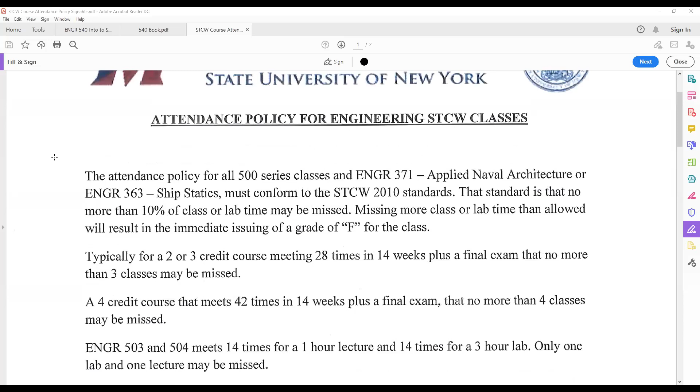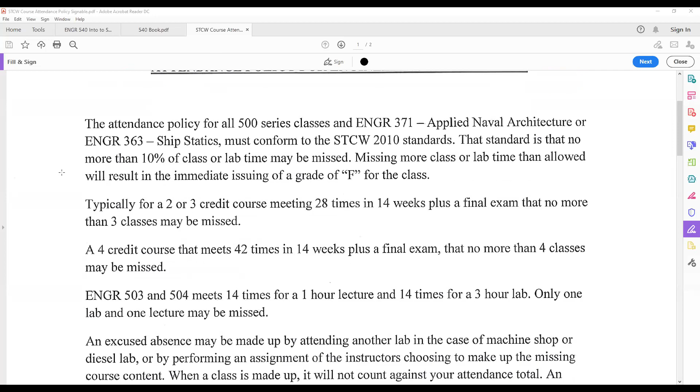So this is an STCW required class, a 500 series class for the engineering side of things. The deck department may have their own form, but this is ours. If you are in a 2 or 3 credit course, meeting 28 times in a 14-week period, I know we're doing 14 weeks smushed into 13, but we're going to stick with the 14 period, so it's better for you guys. Just enjoy that, don't get technical on me, that will just make it worse for you.

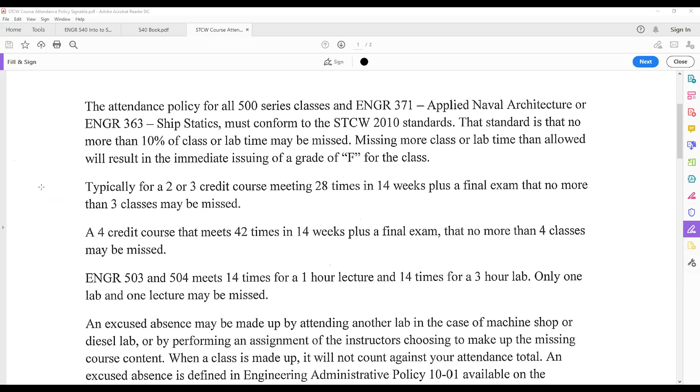Now, you can miss no more than 3 classes. Any more, automatic F, nothing I can do for you. Doesn't matter if you are a chief engineer taking this class for the first time, doesn't matter, Coast Guard doesn't care.

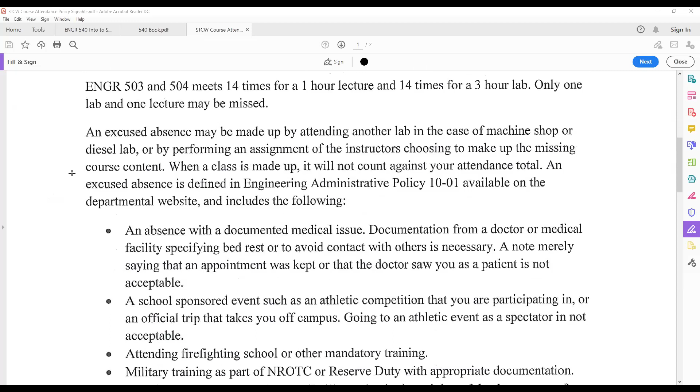Excused absences may be made up in another lab, in cases like machine shop or diesel lab. That doesn't really count for lecture. Excused absences include medical issues, doctors' appointments that can't be moved, or upcoming surgery. Obviously that can't be moved. You do your best to control it, but it's your health—take care of yourself.

I need something that says you were there—a doctor's note, not mom or dad or grandma saying you had a tummy ache that day and asking to please believe them. That doesn't really help.

School-sponsored events—Propeller Club is famous for having these. If you're part of the football team, even though it's spring, I use them as an example because they often have to leave Thursday nights and miss Fridays. So keep that in the back of your head. If you're on a sports team or in some school-sponsored event, we need a higher authority that allows you to miss these classes without repercussion.

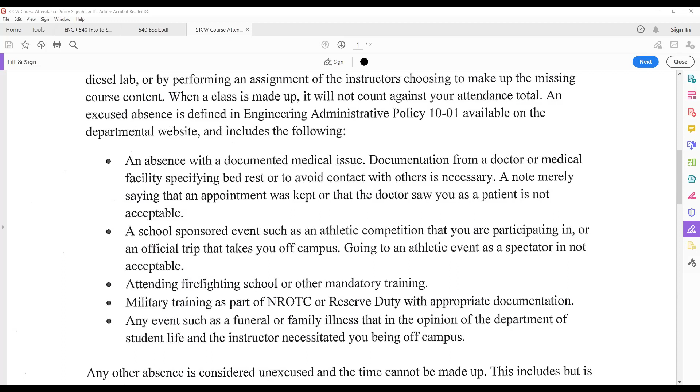Another school-sponsored event: advanced firefighting, basic firefighting, any basic or mandatory training that you can't get out of—something you didn't schedule yourself. Along with that, military training, NROTC, reserve duty, active duty—things you just can't control. That's what you've got to do.

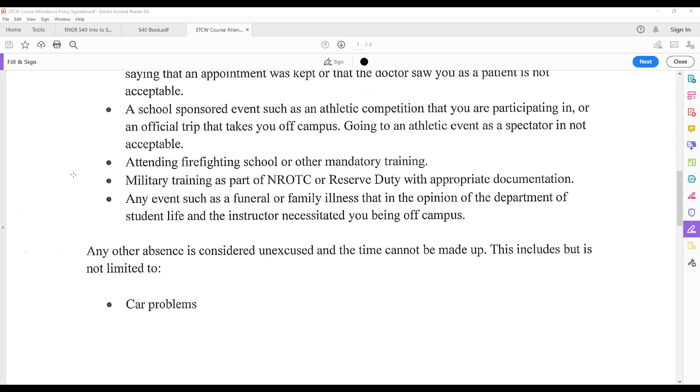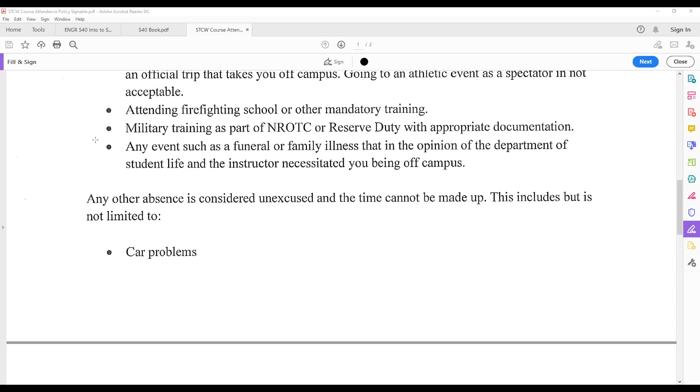Finally, funeral or family illnesses. I hate asking for this, but every time, get something from a higher authority than you confirming you were at a funeral—a card, something like that. I'll probably 100% believe you, but your grandmother shouldn't die three times during the entire semester. Make sure you have something of higher authority than you, so we're all on the same page.

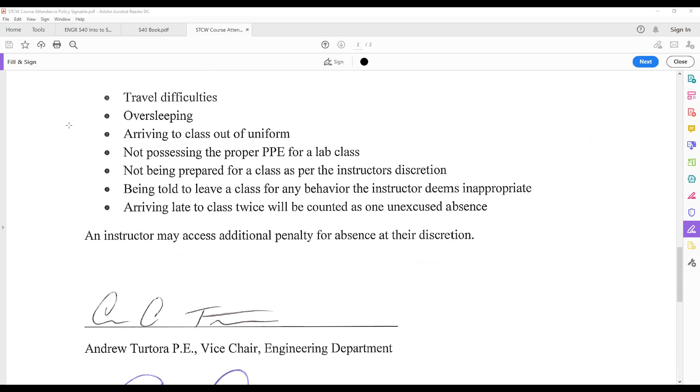Any other absence is unexcused—car problems, though we don't have that problem right now, travel difficulties, oversleeping, arriving to class out of uniform, not possessing the proper PPE, not being prepared, being told to leave, or arriving to class late.

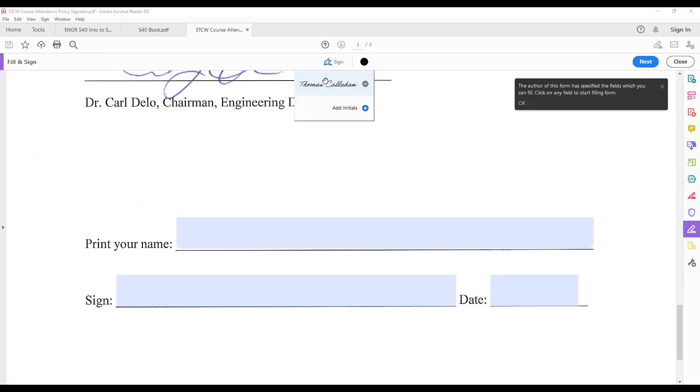Down here is the signature—you can type your name here. I've made this form signable. You go up to this portion right here to sign the document. I already have my name in here since I use this form often, so you can just plop it right in. Make sure you save the document—if you don't save it, none of this will show up.

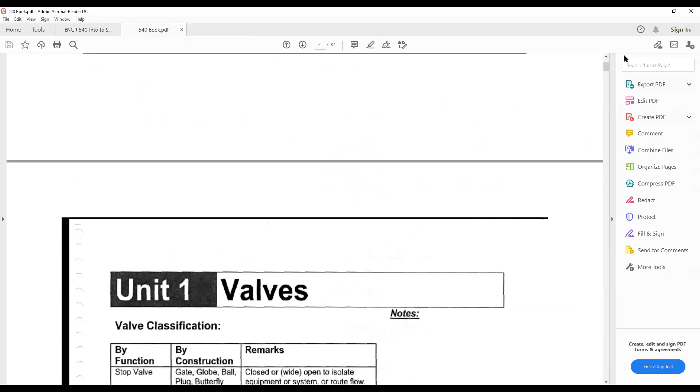Any questions? No? Brian, you are really... I can't hear you. Can you hear me now?

Yep, okay. So I heard you say something about engineering, or if you were a chief engineer—what was that in regards to again? Right at the beginning, basically with the STCW—and this goes into a story I like to tell about this.

Last January I was in advanced firefighting, re-upping and renewing my license. In that room with me was the chief engineer of the training ship, the captain of the training ship, the electrician of the training ship, and the man who teaches advanced firefighting on the school grounds. You have to be in this classroom because of attendance policy by the U.S. Coast Guard—that's what I was referencing. Even if you're a chief engineer, if you don't make it to this class enough, you'd still fail due to the Coast Guard.

The man who teaches advanced firefighting at this school, who probably has the same level of knowledge as the person teaching our renewal class, still has to sit in that classroom for a week straight taking a renewal class for the very subject he spent all semester teaching. So at this point, it really doesn't matter what you are or your grades—it just matters your time in the seat in the class. Okay? Thank you.

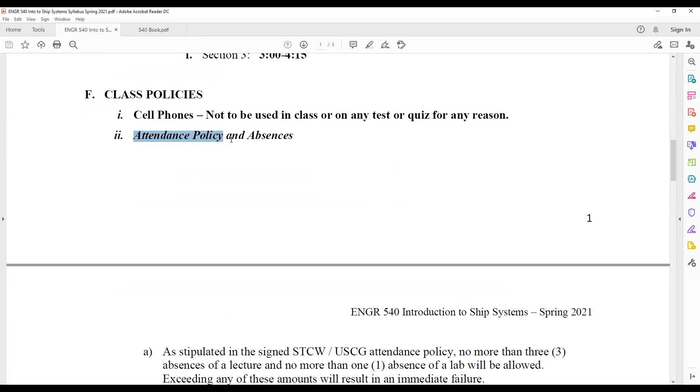Cell phones are not to be used in this class, or any test or quiz, for any reason. You all know that there's no cell service out at sea—you can't look up, oh no, a valve is broken, what do I do? So make sure you have your own knowledge.

Grading—everyone's favorite part. Oh, by the way, if you're confused about anything on the STCW form, or don't want to do that 10% calculation, it's always in the syllabus for any 500 level class. Right here it says for our class.

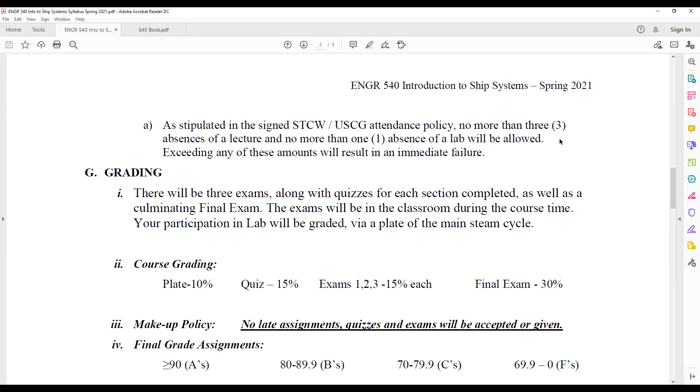Grading: there will be 3 exams along with quizzes for each section completed. Anytime we finish one of these course outlined sections, it's guaranteed to have a quiz the next class.

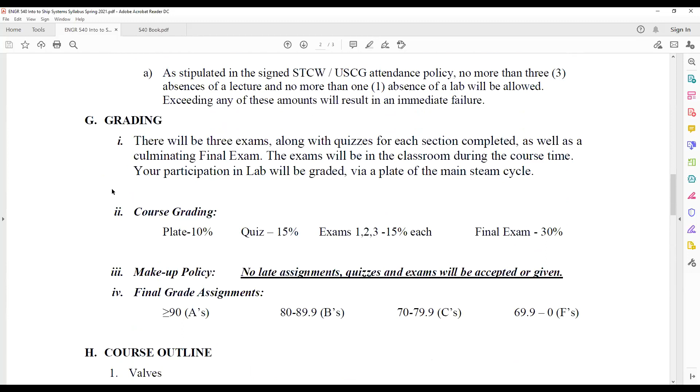The exams will be in classroom during the course time, same with the quizzes, and your participation in lab will be graded. I'll get into that later in the course when we're actually in person.

Just know that you're going to have 10% via a plate, or it's going to be a STEAM tracing. If you were in my class last semester, you're going to see we're doing a totally different way of grading than what we tried last time.

Again, this plate is going to basically be done in lab outside class time. Your lab instructors will help you a lot with that. But again, more on that as we get to in person.

Quizzes: take the average of the quizzes, it's worth 15%. Exams 1, 2, and 3 are all worth 15% each. Final exam is worth 30%.

Now, if something bad happens and we cannot meet in person this semester, obviously we won't be doing 540 lab this semester.

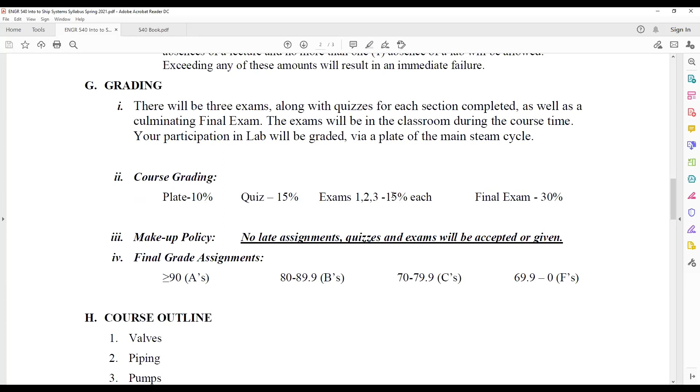We will deal with that if it actually happens, I hope it does not. Forewarning, this plan will disappear. This 10% will probably be taken, and 5% will go to the quizzes and 5% will be broken up to each of these exams. I'm unsure, but I'll take care of that and you'll know by Wednesday. That is a severe backup plan. Makeup policy: there is none. I just won't accept it.

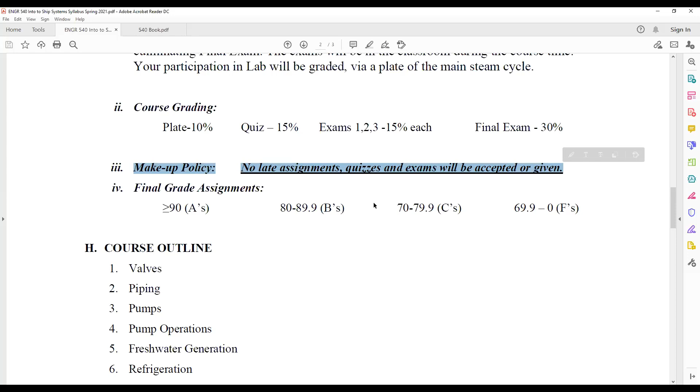Obviously, if you're in NROTC or at a funeral, I'm not going to punch you in the gut just because you're at a funeral. Those things I'm basically going to follow the STCW on. If it's an excused absence, you can make it up. If it's an unexcused absence, you're not making it up.

So, final grades: as you see, 69.999 repeating is an F. 70 and above is passing in this class.

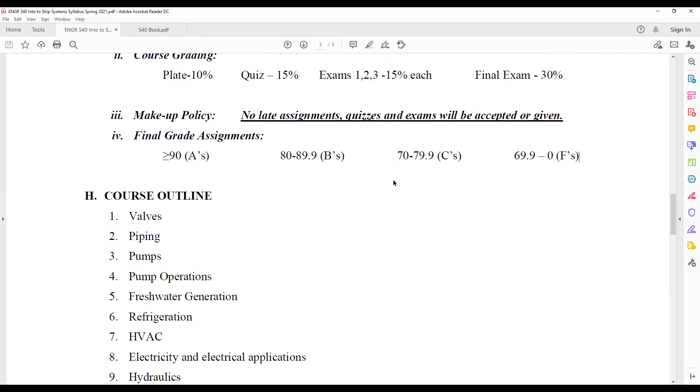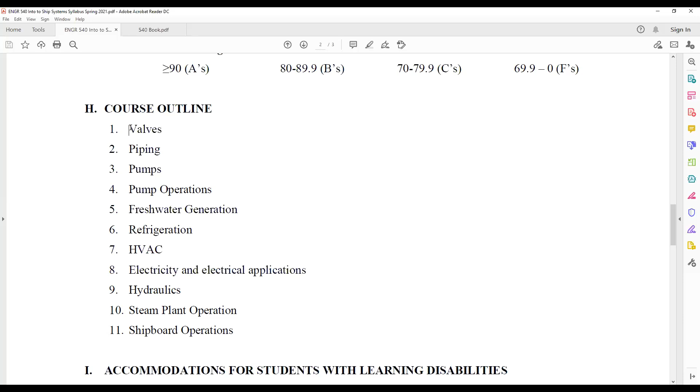Here's your course outline, if you want to know quickly what we're doing for our exam topics. Valves, piping, pumps, and pump ops are all exam number 1. Freshwater generation, refrigeration, and HVAC is exam number 2. And electricity and hydraulics is exam number 3.

We have two weeks where we do steam plant and shipboard operations, and that's going to go into the final, so that way we can hit cruise time with the most amount of steam and shipboard thought process as possible.

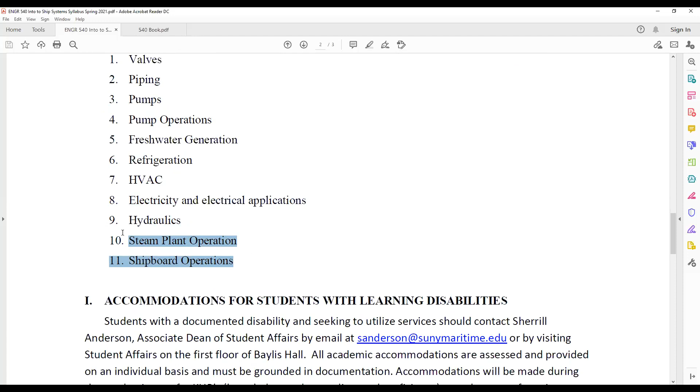Accommodations. Before we hit accommodations, let's talk about academic integrity. Don't do it. Just don't do it.

All right, academic learning disability, that whole deal. Here's my spiel on it. I'm not responsible for emailing the dean for your academic stuff, take care of that yourself. If you need it, email them, and they'll email me. I can't ask for it.

Number two, I'm not going to deny anybody any extra time or anything they need with their disabilities. I'm very clear about that. What I will say is the Coast Guard doesn't recognize it. The sea doesn't recognize extra time. The sea doesn't care if you need an extra 5 seconds or time and a half for anything. That's the reason the Coast Guard doesn't recognize it.

Now we're going into valves - valve type by function. These are the functions of valves, not the actual physical name of a valve. These valves will have different names, like a ball valve, a globe valve, or a gate valve - we'll get into those today - but what those things do as a function will be different. They're categorized by their functions, so we're learning about those first. A stop valve is closed or wide open to isolate equipment or a system, or route flow.

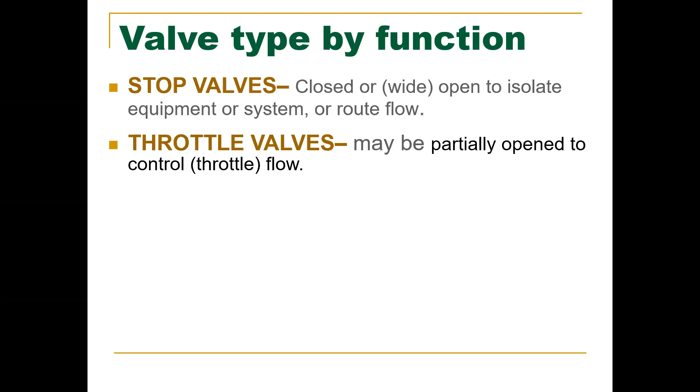Now you have throttle valves - these are partially open to control or throttle flow. Check valves permit flow in one direction only. So if you have flow going in one direction, it will only allow flow in that singular direction. It's a mechanical device - you cannot control it manually.

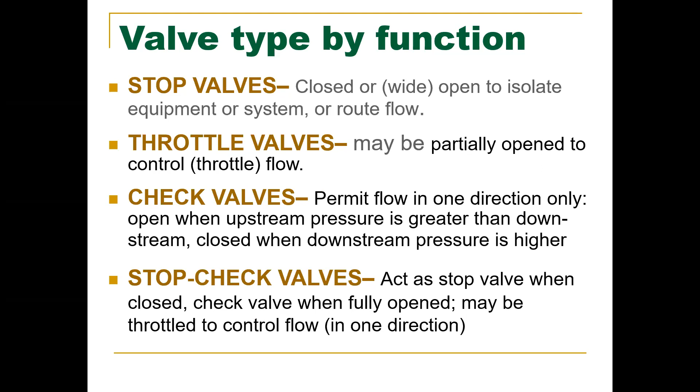Stop check valves act as a stop valve when closed and a check valve when fully open, or may be throttled, to control flow in one direction.

We have regulating valves. These can be automatic, and they have to be, to control the flow at one location in the system in response to a signal. This signal can be anything. If it could be measured, it could be turned into a signal that a regulating valve can decipher - flow, temperature, pressure, level, anything. Quite literally any single thing that can be measured can be turned into a signal from another portion of a system or a different system. So you could take information from any system and control another system. It could be 2 inches down, or 20 feet away, or 2 miles away.

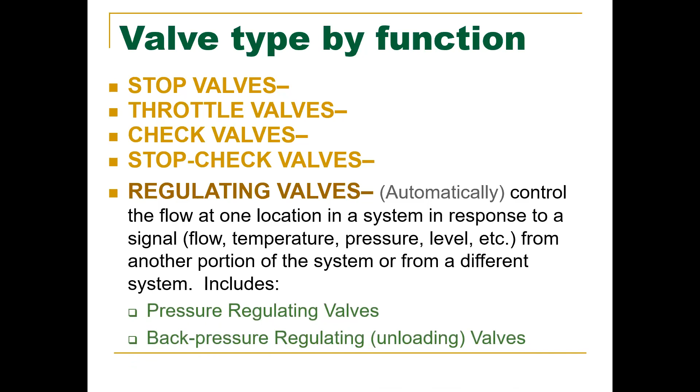Now we have these two types: a relief valve and a safety valve. They're brought up together because a lot of people get these two confused. So first, the relief valve - both of these are automatic, let's be sure about that.

Relief valves open at a predetermined level above the normal operating pressure to protect the system. So let's say we have a pressure vessel, right? It wants to exist at 80 PSI.

Now we have a relief valve. Let's say this pressure vessel is just an air compressor tank, and we have a broken air compressor automation - it's just broken, it's just sending air pressure constantly. So we have a tank that wants to be set at 80 PSI without a relief valve, and we have a broken air compressor that's just constantly sending air into this tank. What's going to happen to this pressure vessel?

It's going to blow up. It's going to have a failure, right? So if we're going to have something that's going to have a failure, well, we need something to be able to protect it, right? And that will be both the relief valve and the safety valve.

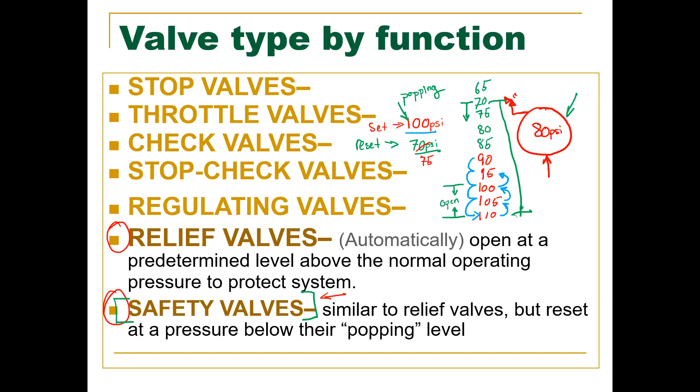So moving on to gate valves. Let me get a different colored pen. So gate valves, their functionality is a stop valve. They only go open or they're closed, and that's it.

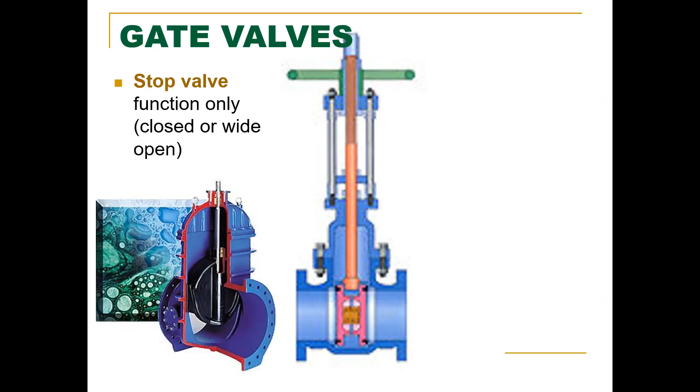We have a couple pieces here with nomenclature that you should know. First of all, we have our hand wheel, the thing we're going to be turning. That will function to either open the valve, lefty loosey, righty tighty. Going to the left will open the valve, to the right will close it.

We have the stem, which connects the hand wheel all the way down to our disc. Our disc is this black piece right here that I'm circling. That's the actual physical valve that you see. It looks like a castle gate, that's why it's called a gate valve.

And then we have what's known as a seat, right here, highlighted in green, and it goes around the entire thing. That's the portion where it's metal-to-metal contact, where my hand down here is the seat, and where the disc is coming down onto it. They make physical contact, and those two spots are where it's actually sealing, where the disc moves and makes contact with that seat. We have the body of the valve.

We have the bonnet, that area right up here. You can see it's going to be the one that houses - the bonnet is what houses the actual gate when it's fully open.

We have the stem, I went over that. We have the yoke - the yoke up here basically holds the hand wheel in place, for the most part. And then we have the packing gland. The packing gland is what stops any of the fluid from escaping between the bonnet and the stem.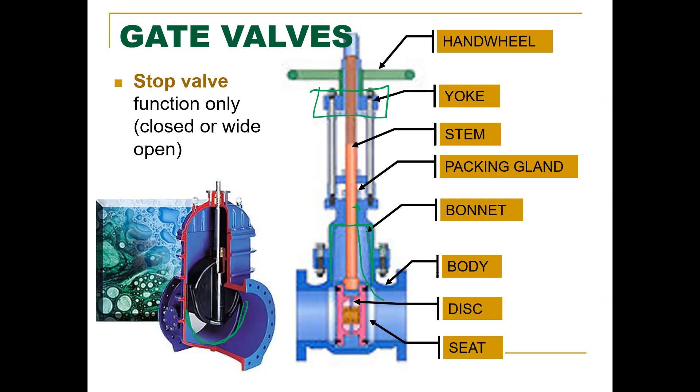So it has like gasket material, it'll have packing material. It basically stops any fluid from getting out, which you guys will learn more about come 542.

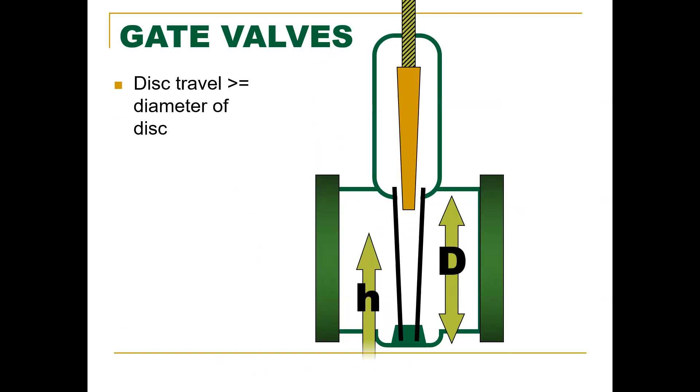Now, disc travel is either greater than or equal to the diameter of the disc. So that orange part moving up is our disc, getting out of the way. The height is equal to the diameter, and when it's fully open, it has little resistance to flow.

So why would we not want this as a throttle valve? If I move the disc down to here, we have like a 75% open valve. Will the pressure break it? How would it break it - shearing, bending? It's not going to shear it. You'd have a lot of force there if you were trying to shear it, because every single time you open and close this, you might shear off and snap your valve. That would be bad, but it's not going to be shear.

If we use the throttle, what would happen over time? Would it bend and not sit in the seat? It's not going to bend. Would it erode? Yes, it's going to erode. Eventually, over time, this will erode.

Now, some may be faster than others. If you are working on a dredge ship and using a gate valve to push a slurry of sand and water through, you're pretty much going to be sandblasting this thing 24 hours a day, 7 days a week. It would destroy it in a matter of months, and it would never close properly again. If this was just pure water, pure hydrogen and oxygen, it would take some time, but it wouldn't be months - might be a couple years, but it would still erode it. Same with air - the more you add to it, the worse it gets. But it always goes, and it's the same - this will erode.

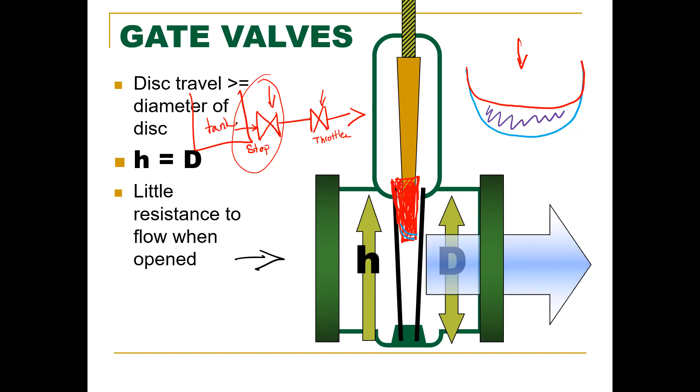That's still going to wear away, isn't it? The throttle valve will still wear away, but you will still be able to stop the fluid. What if the other side of this is attached to a tank? All right, but you need to throttle the flow, and the only valve you have is a gate valve. As long as you have one valve right next to it to be able to stop that flow, you can use it as a throttle valve.

So this is just to make sure that if you're using one as a throttle valve, if you mess that thing up to the point where you can't close it, you still have your backup valve to shut the system off? Exactly. And the stop valve will always be used as a stop valve only.

More than likely, you leave this throttle valve in whatever position it is, 75% open or whatever. The distance between here shouldn't be that large. It shouldn't be like hundreds of feet, because then that doesn't help you at all. You'd have hundreds of feet of, you know, some really bad oil or whatever you don't want on your skin.

So it should be pretty close to each other. And there is one instance on the TSES where this is used. That's why I bring it up. Does that make sense to everybody?

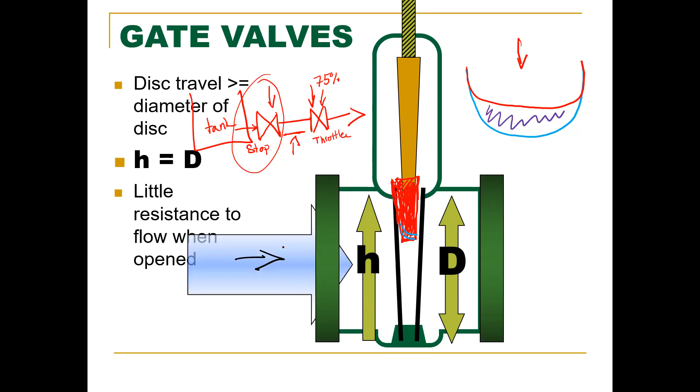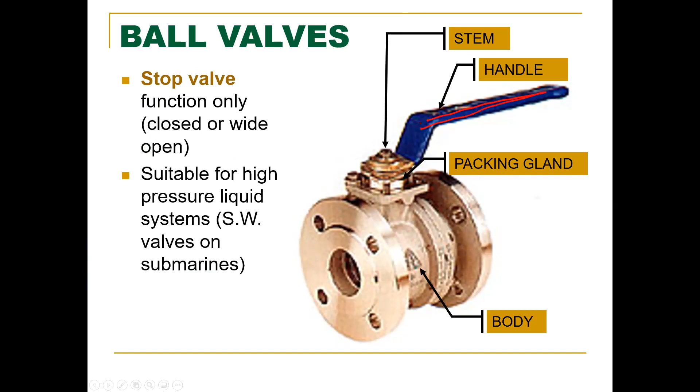The other thing about it is whatever way this handle is pointing, and you'll see better in the next slide, is the ability to tell if it's open or closed. So if you spin this handle 90 degrees, you'll go from open to closed.

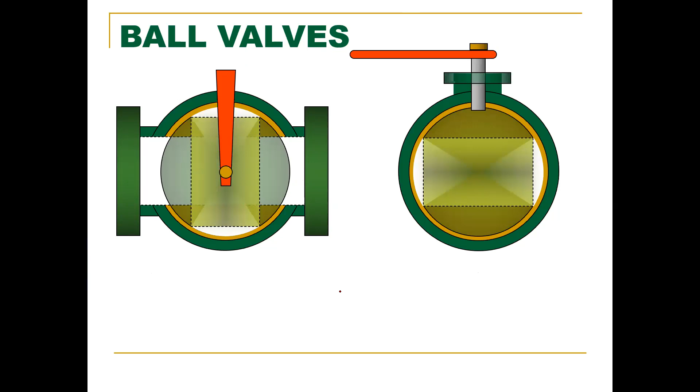So you watch this animation, and it will also be with the flow. This handle is going with the flow, it's allowing flow. Now it is stopping the flow. It's parallel to that, perpendicular to that flow. It's stopping it.

Again, the nice thing about ball valves is that it's a 90-degree turn. It's very easy to open these things. They don't have a lot of wear to them. They pretty much will seal pretty perfectly all the time.

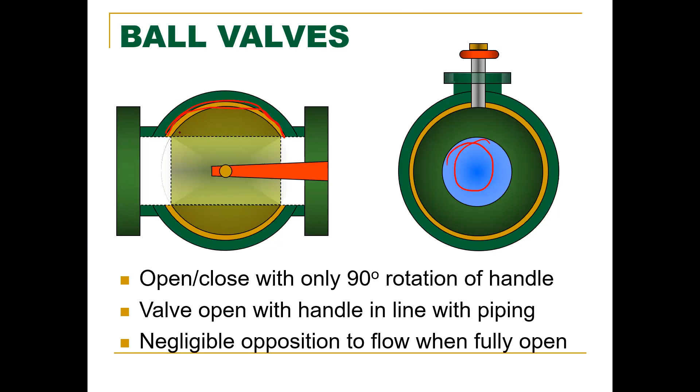And the other good thing about them is they don't oppose any of the flow. The diameter of this hole is the diameter of the pipe, so it's going to allow the flow through it. That's why it's a ball - that way the blockage can be on the outside. Because if the diameter of the ball was the diameter of the pipe, well, you'd have to have a ball that would look about that big, and then all of a sudden you'd have a lot of restriction to the flow.

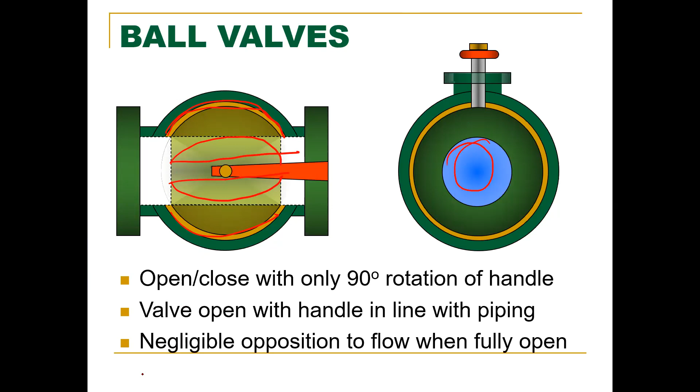We have a butterfly valve. It's a stop valve or throttling function. It utilizes a seat for the first time - it actually uses the seat as a gasket. It still has a body, with its disc, handle, stem. Kind of looks like a ball valve in its operation with the handle.

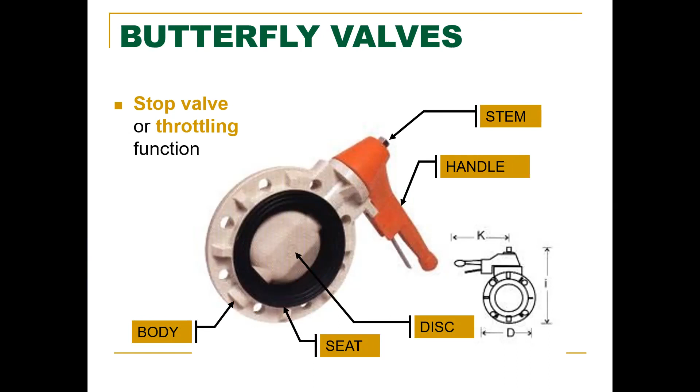Right now it's in the closed position, and what we're seeing in the animation right now is it's opening up. Now, the thing to pay attention to here is this gasket right here and this gasket right here. If you notice, I drew two lines there because they are not in line with each other - they don't meet up. So one side of this gasket is being pushed up against by the valve seat, the valve disc right there. The other one's over here, and it's pushing on it. So the more force you apply onto this handle, the more tightly this is going to seal.

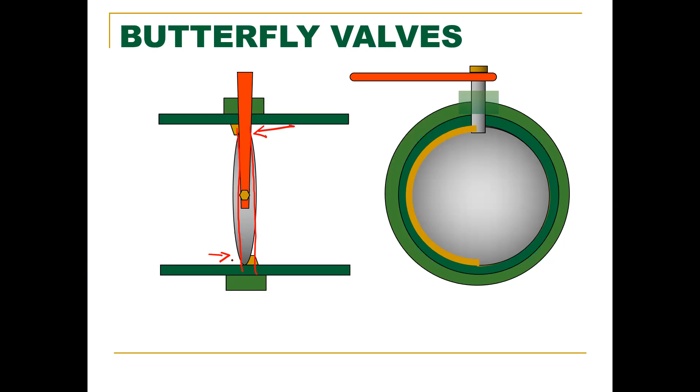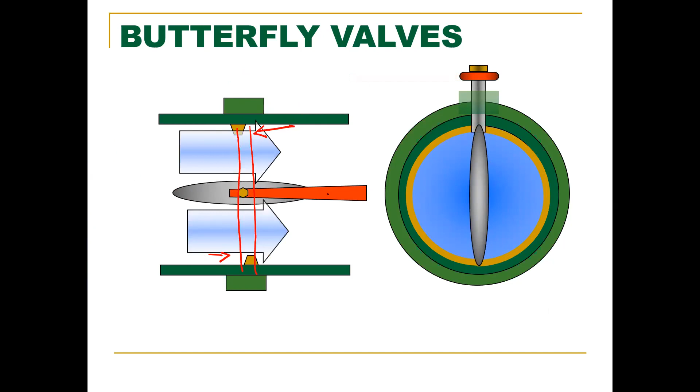And you can see it opens up - you're going to have some restriction to flow because it does exist as an oval, it's actually in the middle of the flow. Any questions on butterfly before I go to globe?

All right, globe valves. Now, globe valves are pretty much a hose spigot valve. Every time, if you were to go to a hose spigot, next time, take a look inside of it - guarantee you it's probably a globe valve. Unless you have one of those new frost-proof ones, then yeah, this is not it. But the nice thing about a globe valve is that it could be a stop valve or a throttle valve.

So if you have a hose spigot, and you're going to be using your sprinkler, do you turn your sprinkler on at full blast every single time, or do you regulate the flow? I try to make it so it's not just blasting at the beginning, but it's not too much - you want it to cover the area that you got, and not get your neighbor's yard. So, at the end of the day, when you're done watering, do you turn the valve off and does it leak by for the most part?

Unless I empty it, like basically have it always over my head and just empty it.

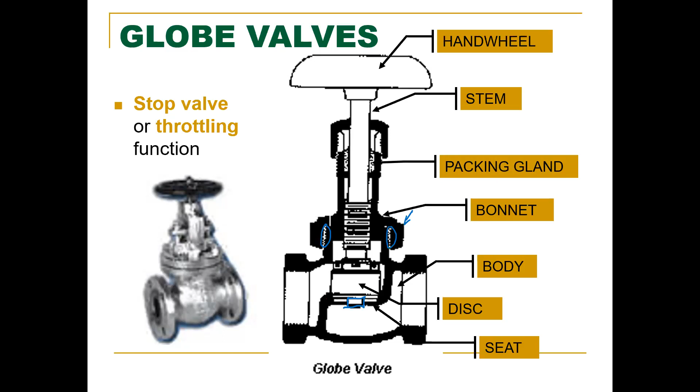So this is what I was talking about as far as the next picture. You could see this angle here, all right, and this angle here - they're going to meet up with each other. So if this has a little bit of wear right in this portion, well, you still have the rest of that surface you could push down on it and it will seal.

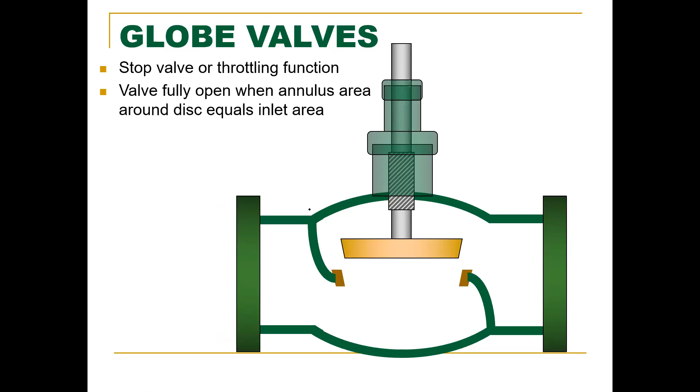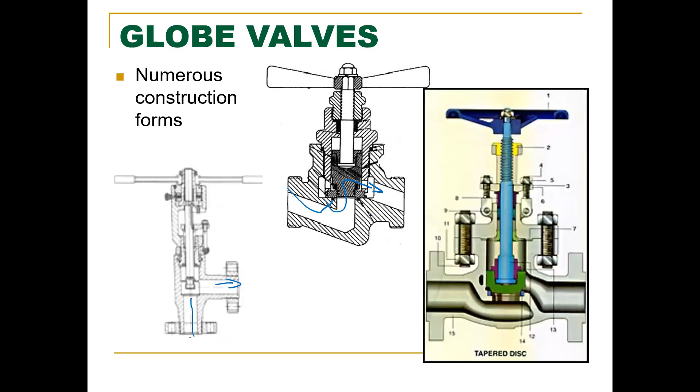So they come in different types and styles. You can see this one's a little bit of a vertical with a 90 on it. This one has a weird little dance to it. They just come in different styles. Not all the time will it look exactly how you see it in the Coast Guard drawings or anything like that. But just know if it's coming from below and then it goes out that direction, it's a globe valve.

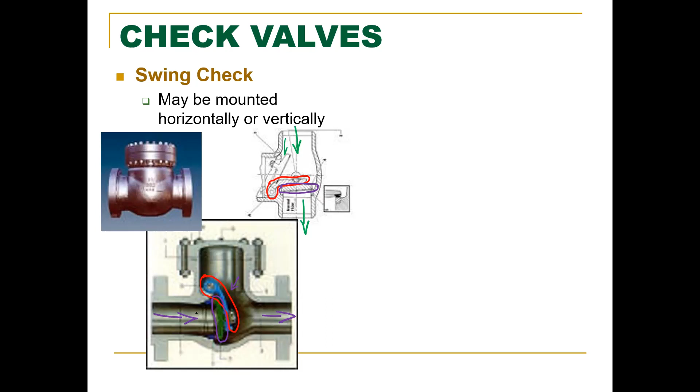If flow is going in the direction I'm showing with our arrows, it's going to flow fine, it's going to push open this gate and it's all good. But if we switch the flow around, going this way instead, well one, gravity is going to close this swing check, right? And two, same with this pressure - it's going to catch this and push it closed. So if the pressure can't overcome this swing check, it's not going to open up.

Now, you want to think about that as we go into this horizontal mounting only of the lift check. A lift check uses a plunger, so you can see the plunger that I'm highlighting in green. It's very mechanical. It rides on this area that I'm coloring in.

If you were to mount that in a vertical position, well, gravity is going to be affecting it in this way and it's never going to close, correct? So flow goes this way, it's going to overcome the force of gravity on this plunger and allow it to pass. As soon as that flow can no longer overcome the force of gravity, it's going to close. Then as soon as the flow goes in the opposite direction, it's going to hit that plunger, and you better hope that it's already closed from gravity. If it's not, and it's coming back, that's going to close it. So that's why it can only be done in a horizontal mounting - if it's vertical, it wouldn't work.

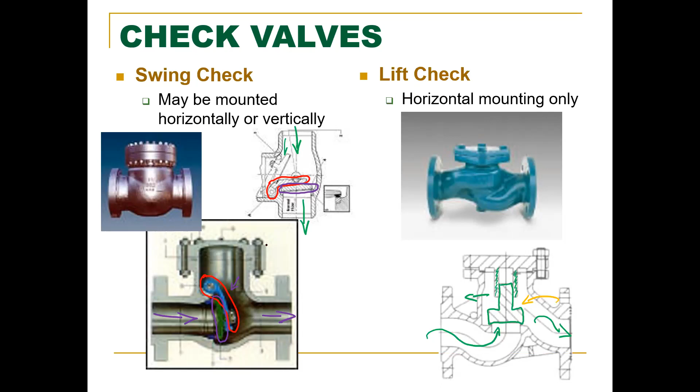Now we have a stop check valve. This is using a globe valve tendency, but it operates as a check valve. If you notice, these two aren't physically connected - they are gliding up and down on each other. So it allows for fluid to come through if it has a high enough pressure to go up to this point. The nice thing about these is you can use them as a throttle valve also, because it's a globe valve, and it will still operate like a stop check.

Again, because it's using the plunger style, it can only be mounted horizontally, not vertically. Stop check - makes sense?

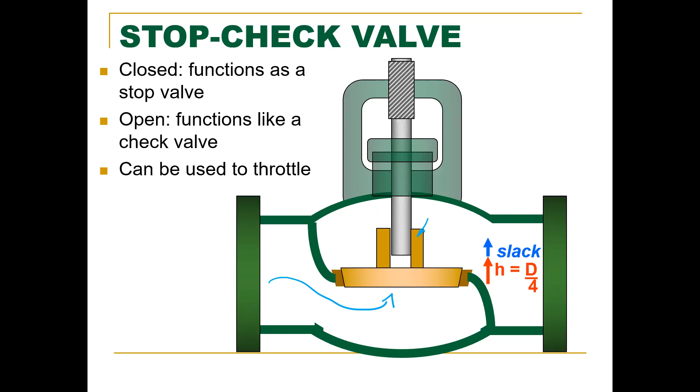Okay, good. Valve system nomenclature. We have isolation valves. This is a pump right here, that's the symbol of a pump. We have a suction and discharge. Suction and discharge are in reference to the pump, the system, the equipment that it is a part of.

If I put another pump right over here and pop in two more valves, what is valve number 1? Is that a discharge or a suction? Suction - it's a suction, right? Because it is in reference to the equipment it's servicing. Doesn't matter that there's another pump over here. Just because it's the discharge of this pump doesn't mean that all of a sudden you now have a discharge again to another pump - that wouldn't make any sense. This is now your suction.

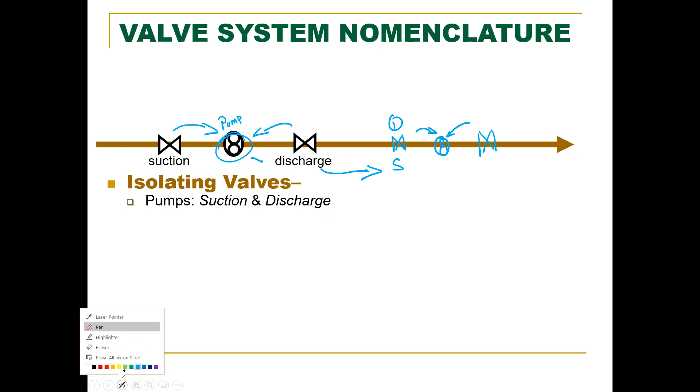Moving through, we have a fuel oil heater. Well, a fuel oil heater doesn't suck or discharge, it has an inlet and an outlet - it's the inlet to your equipment, it is the outlet to your equipment, that's what it's in reference to. And as we come through, we have a meter. This meter also has an inlet and an outlet, again, in reference to its equipment.

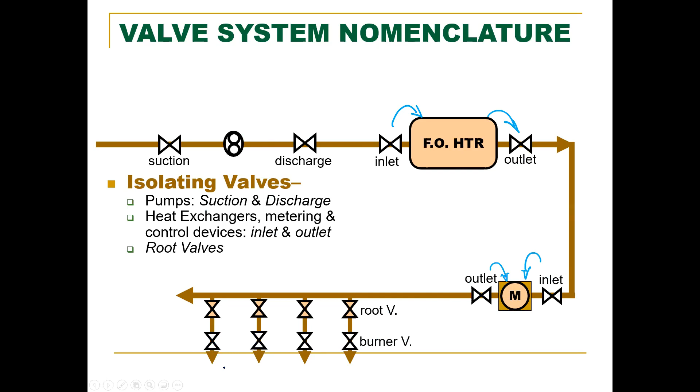And then we have what's called root valves - so we have our root valves to our burner. This is our fuel oil service for our boilers, here's our 4 burners, and this is the actual tracing of our ship. And then next class, we're going to be getting into control valves and all that automation.

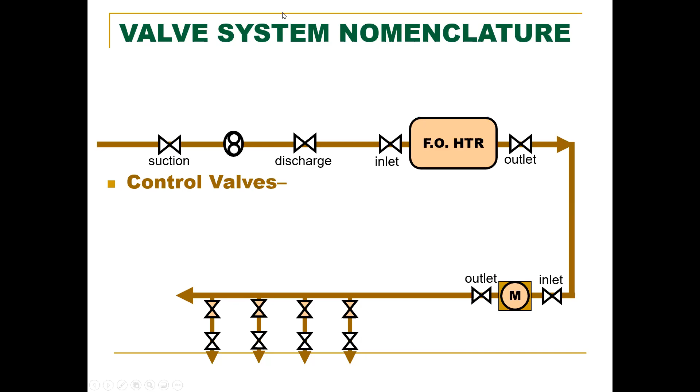Discard that. Let's go here, open up this thing, go over to this, and pop this open.